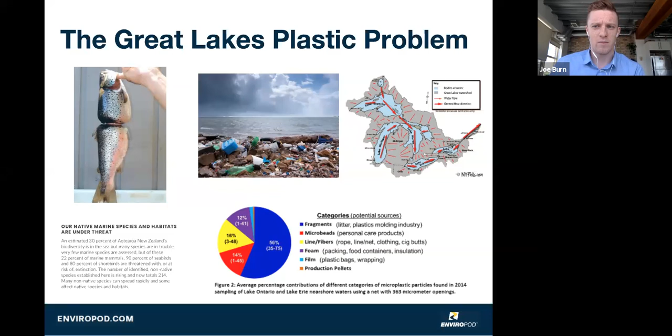We've got my friend here, Tim the Trout, on the left-hand screen, this poor little fish who was recently pulled out of Lake Ontario's Mexico Bay. He'd grown up with a rubber band around his body and had to grow up like that. He's just one of our many fin friends living like this, subject to a lot of the punishment that we as a species are inflicting on them. So both on a macro and micro level, we're seeing it as something very prominent in the Canadian market at the moment, and something that really needs to be addressed.

Just touching on some of those impacts, we've established that there's quite a lot happening right now. What exactly is that doing? I'm going to touch on suspended solids through the presentation as well, as that's something the LittaTrap looks to eliminate. Those have been proven to be very harmful to aquatic life, reducing fish spawning and survival.

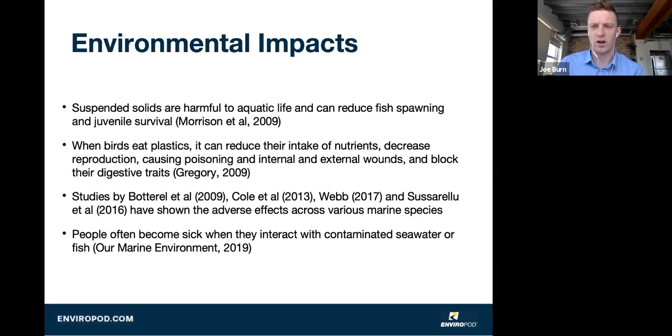Marine plastics, quite self-explanatory—we're having a lot of birds and fish eating those, causing adverse effects across marine species. People are also proven to become sick as they come in contact with this contaminated water, and fish consuming great amounts of plastic are starting to have noticeable adverse effects on humans as well. So we're definitely seeing that the problem is active, with some really negative repercussions.

So what's the Canadian government starting to do about that? We were really encouraged, and a big reason for us coming out here, is them addressing this problem and now looking to do something about it.

That was prominent in the Ocean Plastics Charter released in 2018, a great piece by the federal government that I'll share a hyperlink for at the end of the presentation. Basically, it outlined a desire from the Canadian government to step up and say, we want to be the leader amongst G7 countries—the ones seen removing these pollutants, advocating technologies such as the LittaTrap, raising public awareness, collecting data.

And removing this debris and pollutants from our shorelines. So that was really encouraging for us—that they acknowledged there is a problem, but want to step up and be the leader right now. Encouraging enough to put myself through a Canadian winter for sure.

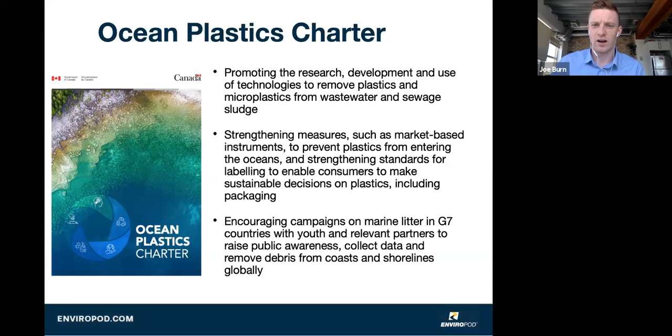Now just transitioning back to who EnviroPod are and what we're doing here. EnviroPod was incorporated way back in 1996 in a small town in Australia called New Zealand, as we like to say over here—a bit of an ongoing joke.

That joke was never more prominent than a recent trip I took to High Park before the coronavirus, where I saw this map of the world, and New Zealand definitely looked a little worse for wear, kind of a subordinate of Australia there. Hopefully we can use the LittaTrap to put us a bit more prominently on the map going forward.

But we were established way back in 1996 in New Zealand, part of a much larger group called Stormwater 360. Stormwater 360 is Australasia's leading catch basin company across both Australia and New Zealand, and we have over 50 years combined experience in stormwater management at this company.

We can see every year of that here—my two bosses, who are also very prominent in the Canadian market, Mike and Greg, back in a time when afros and orange jumpsuits were cool. So it really does speak to the amount of experience we have with a whole lot of technologies.

Again, just here in Canada with EnviroPod to promote this LittaTrap, this very new solution for which there are now over 25,000 installations worldwide, spanning across New Zealand, Australia, Canada, and California in America. We are very established here in the Canadian market now, myself here in Toronto for about the last year, and we've been here as a company for about 3 years.

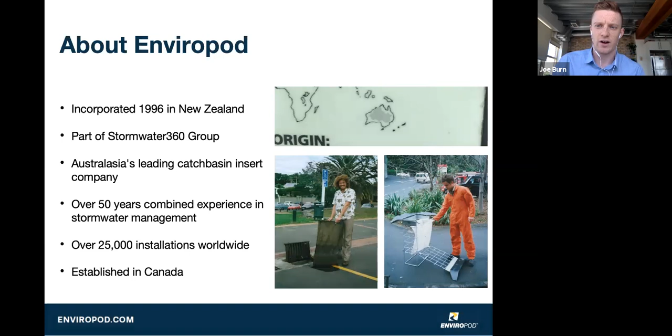And now what is the LittaTrap? So the LittaTrap is our marine plastic solution.

As I've discussed, Mike and Greg, great stormwater engineers, great minds, but first and foremost they were just free divers getting out into the Auckland Marina and seeing firsthand the vast amount of plastic that is in our marine environment. They were seeing it themselves. And they thought, with their backgrounds, well, I've got the expertise to do something about this, and I think I will. That's where the motivation for the LittaTrap came from, acknowledging that this isn't just a municipal problem, a manufacturing problem, or a private problem.

This is an everyone problem. And so they wanted to create something that was very cost effective, that could be used by these ranging sectors, and was also hand maintainable, so that it is a very easy and viable business solution. We don't want to target ourselves to just these municipalities. There are a lot of projects there for the LittaTrap, but we want to advocate its use in business and manufacturing settings as well.

I think the latest number I heard is around 8 to 10 million tons of plastic going down our waterways every year. And with 80% of that coming from land, stormwater drains are the ideal first defense location. So they designed the LittaTrap to be just that. And that's really how it's being positioned at the moment, as a pre-treatment or standalone treatment device to deal with sediment, and then this marine plastic element as well.

Just running over some of the key benefits of the LittaTrap, and as I do, got a quick installation video on the left here. Feel free to watch that one as well, and ask any questions at the end, please, if you are interested in how this installation process works at all.

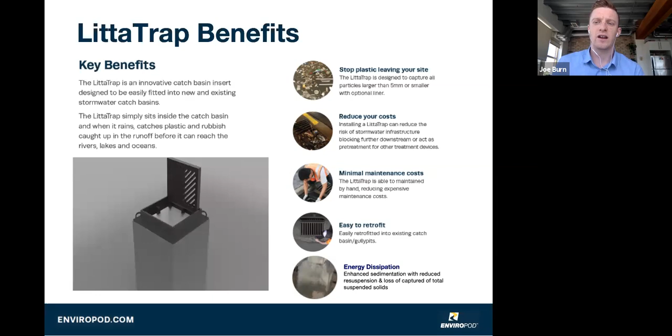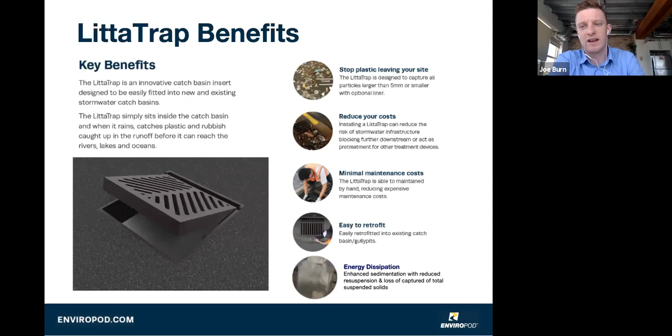So by putting a LittaTrap upstream and catching a lot of that stuff, we're going to decrease the risk of that happening. And to the engineers in the audience today, the idea of a treatment train, very big at the moment, I'm sure we all know. Maybe you've got an expensive stormwater technology downstream, maybe a jellyfish, a Stormceptor. Those are very expensive technologies, we know, and the maintenance cycles are also very high and expensive. So we want to make sure we're taking care of these technologies, and by putting a LittaTrap upstream, we're going to take a lot of burden off those technologies, therefore increasing their lifespan and decreasing the maintenance cycles on those.

There are minimal maintenance costs associated with the LittaTrap, as we've touched on, due to that hand maintainable nature, and it is very easily retrofitted into existing sites, something often quite difficult with stormwater technology. And finally, we are seeing reduced resuspension and loss of captured total suspended solids with the inclusion of a LittaTrap.

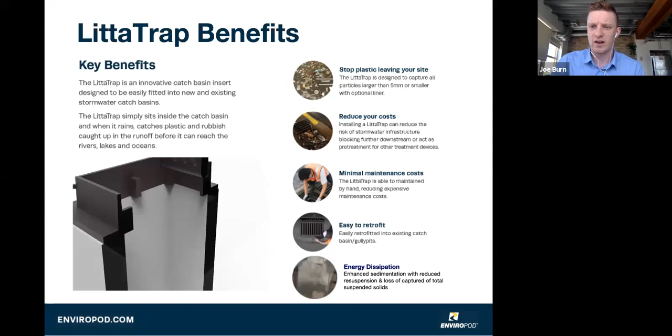This is something some people, we've had a bit of pushback on originally. They think, how can a 5mm mesh catch something as fine as a particle? And what we've found with the LittaTrap is it's drastically increasing the performance of a catch basin by having that in the drain. And we are seeing up to 50% TSS removal. So I will, as the presentation goes on, continue to address how that happens, but we are seeing 50% TSS removal with the inclusion of the LittaTrap.

Just touching on some of the components really quick that make up the LittaTrap: it is a box and a drain. We've got to ensure it's a very well engineered box and a drain, and it absolutely is.

Starting with the bracket here, our stormwater technology's got to take some pretty high weight at times. We've got to imagine a scenario where this LittaTrap bag is completely full. We've got that once in a decade storm coming through. A lot of water is being pushed into our drains, and that means a lot of weight for our LittaTrap to take as well.

And we've got to make sure it's designed to take that weight, and it absolutely has. This bracket here designed on a computer software called Finite Element Analysis, and it's been ensured that it can take 300 kilograms of weight. So we're going to have enough safety to really maintain in these once in a decade storms that we do see, because that's when we need our stormwater technology to be working at its best.

New Zealand's a pretty big sporting nation. We love our sport, and we couldn't quite figure out a way to incorporate a rugby ball into the design of the LittaTrap. But another one of our really big sports that we love is sailing, and we took a little bit of motivation from sailing, where the batten is used in the sail. That's used to give the sail some shape, some integrity, a bit of definition. And that's exactly why we've used it on the LittaTrap bag here.

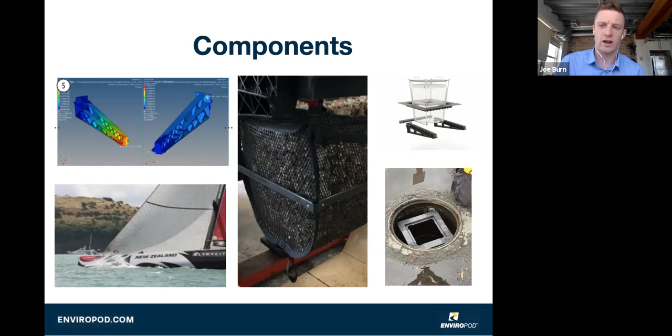Probably the number one question we get everywhere we go with the LittaTrap is, what about when it's completely full? Won't it cause flooding? The LittaTrap has been designed with an overflow bypass, as we can see at the top there. So as this LittaTrap's completely full, we can still allow good water flow.

I have been told by the top stormwater engineers at our company that the catch basins here in Ontario will only pass water through at 20 litres a second, even in those once in a decade storms. The overflow bypass on this LittaTrap has been designed to pass water through at 60 litres a second. So we've always got 3 times the safety we need, even in these once in a decade, really harsh stormwater events.

Obviously at this point we are going to be letting our pollutants out because the LittaTrap's completely full. That's why we do recommend these are maintained at around 80% capacity to keep everything working as it should. But we do understand situations happen, and that's no more prominent than right now with the coronavirus pandemic.

I'm sure for some of our municipal partners, it's a lesser priority to get out there and maintain a LittaTrap, and it might get neglected a bit. So we've got to make sure that in this event, where it can't be maintained and a lot of water flow is still coming through, that it is made to take that, both from a weight and an operational standpoint. Unfortunately, we will be letting the pollutants out at this point, but at least we're not causing any flooding.

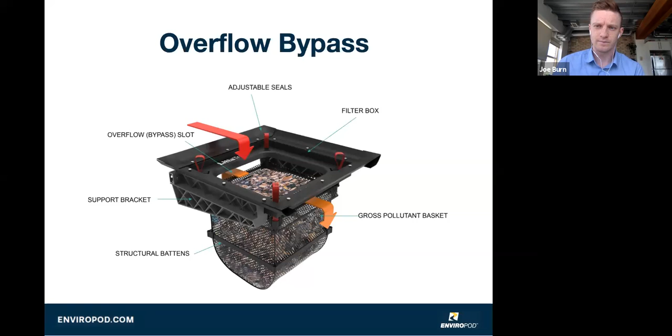The first one we really want to promote here in Canada is the sediment liner, or the geotextile liner for the engineers here. What we see generally as common practice at the moment during the construction phase is just to stick a sheet of cloth underneath the catch basin to make sure no sediment is escaping during that construction phase. As we all know, that's very counterproductive, because now the catch basin's not working as it should - it's completely blocked, and so we are going to see flooding.

As a result of that, a lot of times what will happen during the operational phase is someone will come and just stab a couple of holes in the bag there, which again is very counterproductive, because now we're letting those very sediments that we're trying to stop get into our catch basins. So we wanted to propose this solution with the LittaTrap - installing it with the inclusion of a sediment liner bag inside. That's going to allow us to have a fully working and functioning catch basin. Our overflow bypass is still there, but we are going to catch all these sediments.

At the end of the construction phase, if the site permits it, we can look at simply uninstalling that LittaTrap, removing the sediment liner bag, and leaving the LittaTrap itself in as best practice. Or we can uninstall the entire LittaTrap and take a lot of those parts from site to site. The majority of parts for the LittaTrap are going to be reusable time and time again.

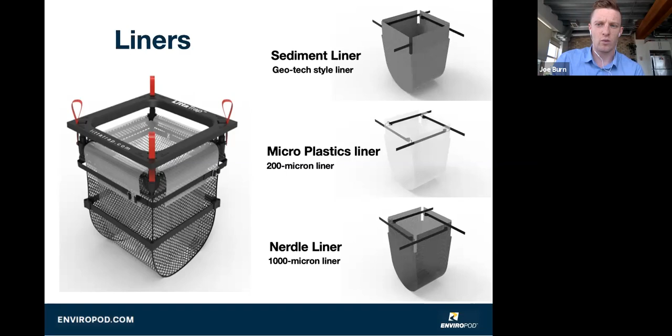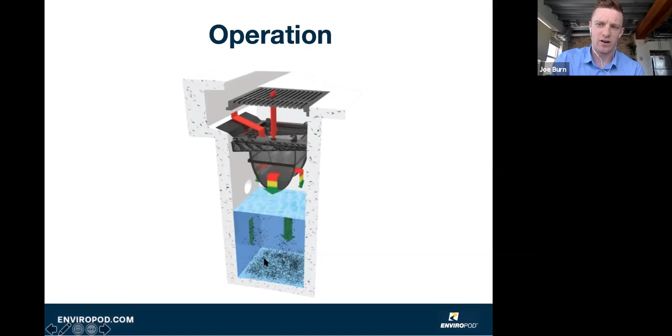Going back to that operational side now, how the sediment removal process works. As we know, we've got our catch basins here, and sediments and marine plastics build up around the location, whether it's a city street, a car park, whatever the case may be. As we get our rainfall events, all of that's then going to be dragged and ushered into our catch basin, where hopefully, in an ideal world, our LittaTrap sits. Due to a permeable bottom that we've put in, or some previously caught material, the rate and force that the water comes in with is going to be significantly decreased by having that LittaTrap in there. That's what's going to allow our sediments to sit very safely at the sump of the catch basin.

I've got a video here that's hopefully going to show us how that works and expand on it a little bit more. So this first video on our left here, on my left, that's a regular control catch basin without a LittaTrap.

Ideally, all those sediments would just sit at the bottom anyway in our control catch basin. But what we see here is that water's coming in with quite a lot of force, quite a lot of velocity, and something as fine as sediment is never going to be enabled the luxury to sit comfortably at the bottom of the catch basin there. And so it's in a constant state of resuspension, constantly going out our outlet pipe, and we're losing all those sediments.

Well, we can see the second one here on the right with the inclusion of a LittaTrap. The bottom of the catch basin is remaining largely untouched because of what we touched before. And that's going to allow our sediments to sit very safely at the bottom of the catch basin.

And as I discussed, got this diagram at the bottom here. Don't worry about it too much, I can send anything through to people afterwards. But we are seeing up to 50% TSS removal with 4 liters a second with the inclusion of a LittaTrap.

Wouldn't you believe it, we were set to do our ETV testing to certify this in the last week of February. Unfortunately, coronavirus came along and did have other ideas for us, but we have done some third-party testing here in Mississauga at a place called Good Harbour Labs. Not sure if anyone's heard of that. But if any of the engineers in the audience are interested in those third-party results, we're absolutely happy to provide you with those, and hopefully we will be getting our full ETV certification as soon as possible. But again, it isn't the LittaTrap that's getting this capture, it's just enabling the catch basin to work better than it otherwise would.

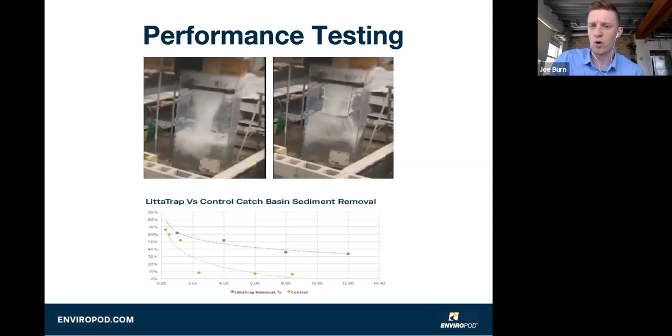It's also important to know once we've got those sediments, we are retaining them. They're not being lost through the process of resuspension. And so we've been doing our scour testing as well to again ensure that we're not only capturing but retaining those suspended solids. And again, we tested the LittaTrap against a control catch basin without a LittaTrap in.

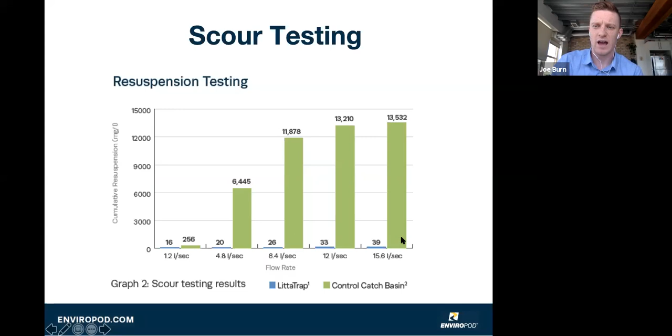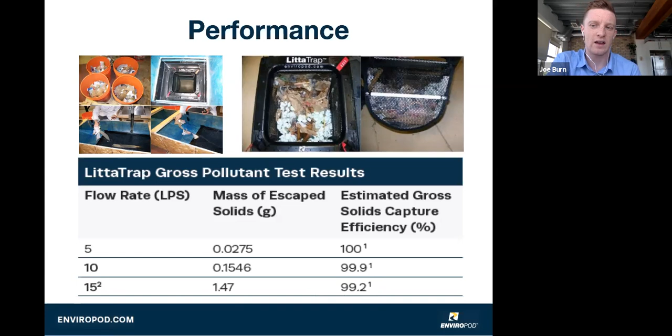And the objective of this test was to completely fill the LittaTrap with these pollutants to blind it, make sure that it's not only capturing those pollutants, but then leave the water on for an amount of time afterwards to ensure that we're also retaining them. Similar to what we saw with that sediment, are we not only capturing the pollutants, but retaining them as well? And what we saw is, again, as far as the test would let us go at 15 liters a second, is over 99% capture of those gross pollutants, 99.2. The only thing we were losing from memory was just a couple of pieces of broken down polystyrene. And again, this is just with that standard 5mm mesh, seeing over 99% removal of all those pollutants.

Going back to that hand maintainable maintenance side really quick that we did talk about, just showing how easy that is. It's as easy as lifting a LittaTrap bag out with the straps that we see on the side there. LittaTrap bag should cap out at around 50 kilograms of weight, so we feel confident at any time. If you have 2 people, that's a very comfortable lift.

If you're not wanting to get into the catch basin, maybe you don't want to bend down and do damage to your back - a very fair observation. We do provide the specification for a couple of J hooks, so you can simply stand up, put those hooks into the levers there, and pull it out that way. A very easy process. All you have to do then is tip those pollutants out into whatever we've brought with us, maybe a bin or a bag, and then place the LittaTrap bag back in the catch basin again. It's a very easy 2 to 3 minute process that only has to be done around 2 to 4 times a year, so it's a really easy way to take action.

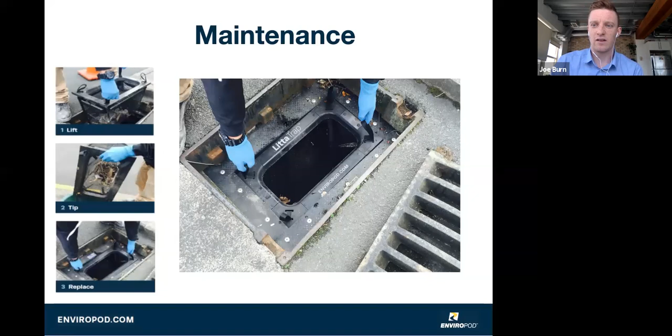I've said before that the bag generally caps out around 50 kilograms. We do deal with some very rare sites where we're seeing quite a lot of sediment capture within the LittaTrap bag - something that's hard to quantify, so we don't necessarily advocate for it, but it's a bit of an added bonus. Once you've got some build-up at the bottom of the LittaTrap, it's almost made a force field of sorts, and a lot of that sediment will fall right on top of that. We will see quite a lot of sediment capture within the bag from time to time, and that could make it too heavy or awkwardly heavy to get the LittaTrap bag out of the catch basin.

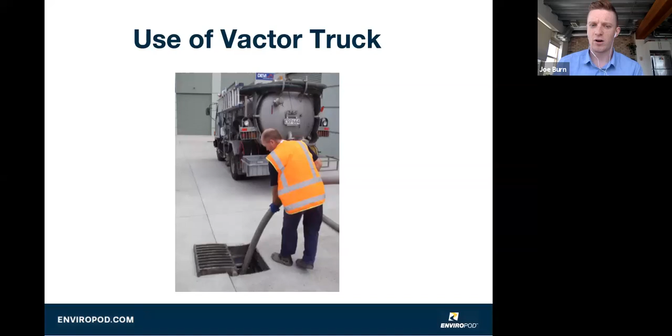So we do offer the ability to get in there with a Vactor Truck. The LittaTrap bag is a pretty durable product - it's had to be designed to take the harshness of Canadian winters at -20 and the horrific heat of an Australian summer at the other end of the spectrum. So it's a pretty durable product, and we can get in there with a Vactor Truck as well. All that we ask is that we're putting a rubber boot at the bottom of the Vactor Truck there to ensure we're not seeing any rippage to the bag.

Transitioning now to some cost-saving opportunities and benefits that we see with the LittaTrap. First and foremost, stormwater credits, where I do the majority of my work here in Ontario, are a very prominent thing. Waterloo, Kitchener, Mississauga, Guelph, and Newmarket are all currently offering stormwater credits on those stormwater fees and taxes that we see on sites. And these can be quite expensive - we've worked with clients where they're thousands of dollars, so a 15% break on that can be pretty significant.

We're currently doing a project with the city of Mississauga to see what credit clients would be eligible for using a LittaTrap for increasing water quality and removal of sediments and marine plastics. We're very encouraged with how things are going there with them, and that's some data we hope to have a little bit more on later in the year. Again, coronavirus unfortunately pushing things back there, but we're really encouraged with how that's going. We hope to have some pretty tangible results there, something we can look at rolling out across other municipal partners. So feel free to stay tuned with that one - hopefully we'll have some more good news soon.

Just a couple of others, as we've touched on through the experiments or the lab work that we've done - LittaTrap catching 99% of gross pollutants and 50% TSS removal. That equates to 75% of the total load coming into a catch basin with just one cost-effective device. The cost of unblocking a drain, which we touched on, can be very expensive. By putting a LittaTrap upstream, we're going to reduce that risk - there's going to be a lot less need for a maintenance contractor, and cleaning a LittaTrap versus cleaning a catch basin, the LittaTrap is a lot cheaper.

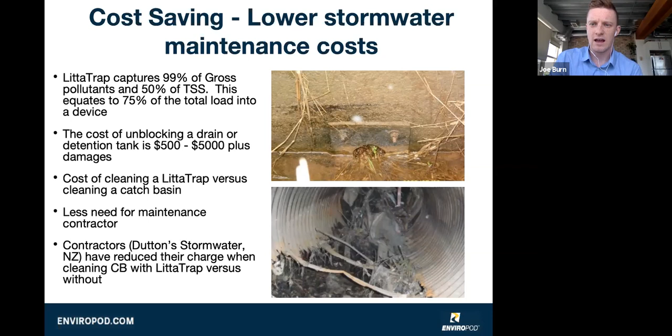We also touched on before how the LittaTrap will often catch a lot of that grittier sediment in the bag itself. Some contractors - one I talked to the other day, Dutton's Stormwater in New Zealand - said they've reduced the cost of cleaning a catch basin with a LittaTrap in it versus one without. The reason for that is they're catching a lot of that grittier, harsher sediment in the LittaTrap bag itself, leaving much finer and easier to vac out sediment at the bottom of the catch basin. And as we know in the operations game, time is money, so this has the potential for some cost-saving benefits as well.

And going back to the idea of a treatment train, again, for the engineers with us today, a pretty prominent discussion at the moment.

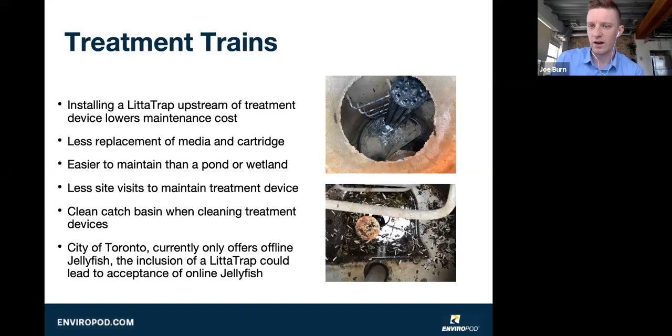By putting a LittaTrap upstream, we can prevent a lot of that. The LittaTrap's also a lot easier to maintain than something like a pond or a wetland. And one final note on the idea of treatment trains, the City of Toronto is currently only offering offline jellyfish. We're hoping with the inclusion of a LittaTrap upstream, we can advocate for online jellyfishes there.

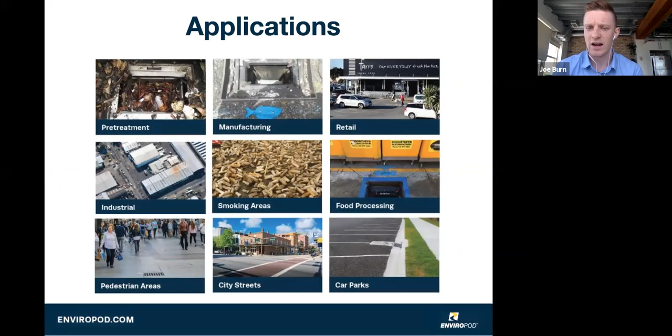Quickly touching on the applications, we've talked about most of these, but as a pre-treatment or a standalone treatment device, we see great application there. Working with a lot of private side clients as well in manufacturing, industrial, food processing, and retail stores where they have things like car parks, and we're seeing quite a lot of runoff. And then our municipal partners as well, smoking areas, pedestrian streets, city streets, and car parks, all very high in regard to pollutants. Just going to a few examples here, just breeze over these.

I see we're already at the 30-minute mark. Time flies when you're having fun talking about the LittaTrap. I'll breeze over a couple of these now. Again, if you've got any questions about them, or you want to talk about some other case studies at the end, feel free to do so.

One of them, we've been doing some work with Brampton, the city of Brampton, at their Sandalwood yard. A very foreign concept to a New Zealander is the idea that the snow that falls on our city streets can become quite dangerous. I wish someone had told me that before I went head over biscuit a couple of times during the winter months.

But what they do at the city of Brampton, where they're a little bit smarter than me, is they get out on the streets and they remove all the snow. They take it to their Sandalwood yard where they leave it to melt, so it becomes less of a safety hazard for the public. Unfortunately, we at EnviroPod were a little bit too slow to figure out the slippery nature of the snow.

But one thing we did identify quite quickly is the amount of buildup we see within the snow. I'm sure we've all seen it, how things like cigarette butts and coffee cups seem to just really stick and merge into the snow. And also sediments are very prominent, very seen in that as well.

So what we did with the city of Brampton was kind of reverse engineer the idea of identifying a hotspot. It was really great that they were taking all the snow here, because they were bringing so many pollutants to one place where they could only melt and run off into a few catch basins. So they retrofitted their entire yard there with LittaTraps, and we're really, really happy with the amount of runoff we saw there, all those captured pollutants.

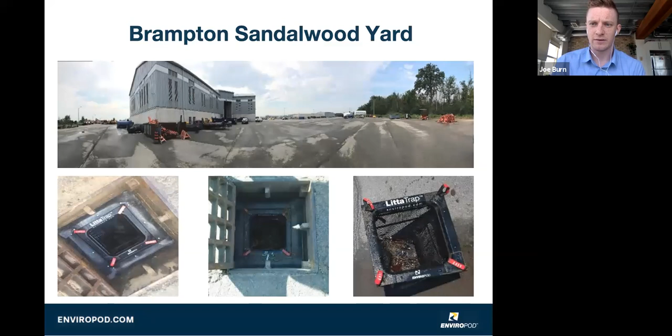Building on that, again, the idea of a litter hotspot. So we did some work with the City of Kitchener last year, a 3-month trial on a busy Queen Street location, as I say.

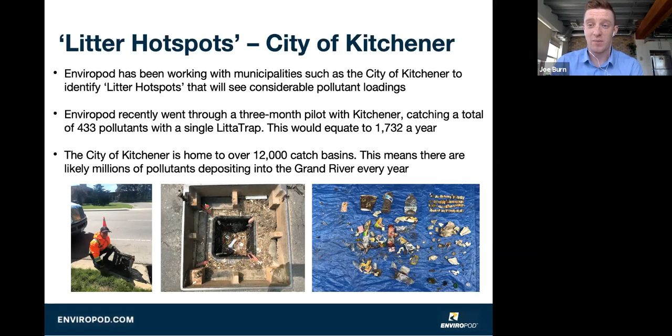I know I just touched on the idea that not every catch basin is built the same, but just humor me for a second here. I did some research - City of Kitchener is home to around 12,000 catch basins. If everyone was even catching half of what that caught, that's likely millions of pollutants depositing into the Grand River in Kitchener alone every year. So it's a very startling number, and then we extrapolate that over Ontario, over Canada, over the world.

It definitely shows just how big the problem is right now, and why the need for action really is upon us. Also seeing great use for the technology in residential areas. This one in Richmond Hill, I think we have a subdivision going in later this year, which should be really great. Anytime you've got infiltration, you're going to need some pre-treatment there, and there is nothing cheaper than the LittaTrap.

And I guess these photos kind of bring me to one other question we get very commonly with the LittaTrap, and that's what about leaves? Won't it just clog? Won't it fill up too quickly? Generally the answer we are finding is no. There is 45 litres of storage in a LittaTrap unit, so we have got quite a lot there.

In addition with leaves, what we'll see is yes, maybe they initially take up quite a lot of room, but as they continue to compress and are broken down, we see them take up less and less room. And if people are smart about their maintenance cycles, instead of doing them sporadically, really making sure we're doing our maintenance before and after fall, we can really get away with quite low maintenance cycles. We are seeing anywhere between 2 to 4 a year is very manageable here in Canada.

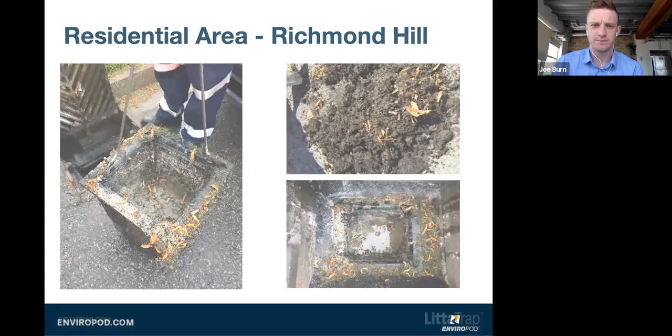Toxic materials is a discussion we want to have as well - another big talking point this year here in Canada. Cigarette capture, like anywhere in the world, is massive here. It's the number 1 pollutant we see in every catch basin. I think a lot of people aren't aware that it is a plastic, and they don't have as many problems flicking the cigarette butt away and not thinking about it. But it's a devastating pollutant for our waterways. It has the potential to devastate and obliterate all marine life it comes in contact with within the first 96 hours, so it's very frightening, and something we need to continue to do something about.

Something I've been seeing in Ontario quite a lot is actually the capture of hypodermic needles and sharps. We've been seeing quite a lot of this, and this is another really big health and safety concern. We'll have these eventually washing up on places like our beaches, marine environments that we interact with - a very serious health and safety concern. We want to continue to identify areas where those are coming from and how we can really prevent those, because that's again quite a scary one for sure.

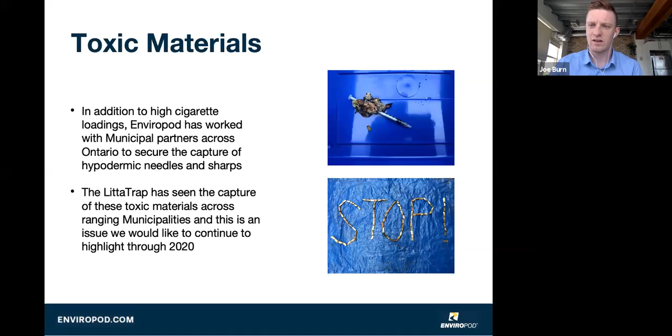Just going to breeze through these last ones really quick since we're on the long side for time already. We do a lot of work with plastic manufacturers, something that's really cool and really important to us. I talked about that with the nurdle liner, the plastic pellet liner, at the start. We've done a lot of work in Canada working with PDI Bulk, Polytainers, and Hood Packaging, all very established plastic manufacturers here in Canada.

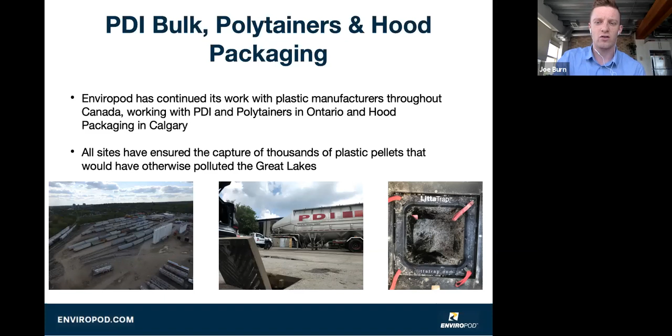This photo on the bottom right here, as I skip through, shows just what that plastic pellet capture is looking like. Again, that's just one catch basin, and we can see a whole lot of resin pellets in there. So the need to use this as a tool is absolutely now on the manufacturing side.

Its application on the private side is something we don't want to breeze over as well. This is a supermarket chain, Farros, from Auckland, New Zealand, and it has really great application on this business side. The idea of plastic capture is very prominent right now, things like the Ocean Plastics Charter. We really want to see private companies taking initiative as well, and we feel like the LittaTrap really caters to this - a lot of private clients are having great success with it because it is very easy.

It's also going to allow you to track a lot of data—great for your CSR reports, to say exactly how many pollutants you stopped this year.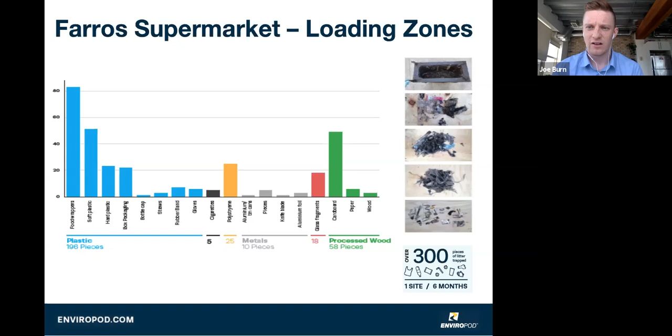What we found at this site is generally what we find at all private sites anywhere in the world—it's become a rule of thumb for us. You'll see about 300 pollutants for a single catch basin over a 6-month period, so around 500 to 600 pollutants per year per catch basin on a private site. That's quite a lot, and something we really want to work on.

It's a really good tool to empower these private companies and help them do something about the problem. The last thing I want to touch on before we wrap up is the idea of using the LittaTrap as an educational tool, working with the next generation to educate and empower.

The motivation for this started back in Wellington, New Zealand, where a group of students went out with some local educators, did some snorkeling, and were fascinated and happy with the amount of fish, marine life, and coral they were seeing in their harbour. But they were also horrified by the vast amounts of plastic, and wanted to set out and do something about it.

That's what led them to do some research and get in touch with us, asking if they could have a couple of LittaTrap units to look over. We thought that sounded like a great idea.

This was quite some time ago now, and it started what's been a really successful ongoing project of developing a great methodology for using this in a safe setting—not getting kids directly interacting with the pollutants, but setting them up with third-party educators, getting them out there under safe conditions with tally sheets to collect data and look at what's going down stormwater drains. It's a really empowering tool to educate the next generation, something talked about in the Ocean Plastics Charter, and it uses kids as a great advocate of the technology.

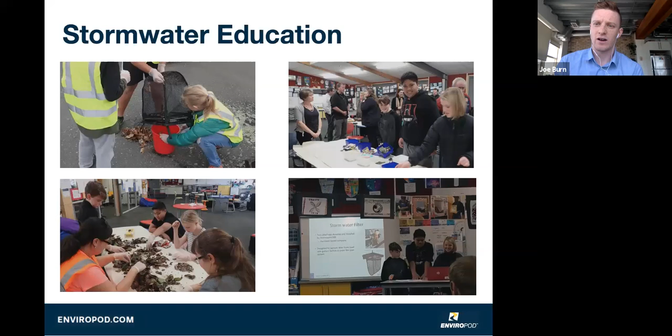We've had some really powerful results. In Wellington, the children demonstrated their findings to members of the community—the board, teachers, small businesses—and it led to some pretty big change. A lot of small businesses looked at putting LittaTraps in, and the city council had a lot more city bins going in after this. So they can be a really powerful driver for change, something we've really looked to build on.

So that pretty much brings me to the end. I thought that was a great one to end it with, to tug on the heartstrings a little bit.

So again, what we looked at today: Canada, along with the rest of the world, is facing a marine plastic crisis. We can definitely see it, and we're starting to see the adverse impacts as well. The Canadian government has set out to do something about that proactively by putting the Ocean Plastics Charter in place, and we're seeing an effort to do better—something we really want to be a part of.

We believe the LittaTrap offers the most cost-effective way to prevent plastics and sediments leaving your site, with ranging cost-saving benefits as well. The technology has been used by municipalities, private sites, and manufacturers across Australasia and North America—a very versatile product that's endured some very harsh Canadian winters and Australian summers, and we're seeing it hold up under quite a lot of stress. So definitely an application for it in today's time.